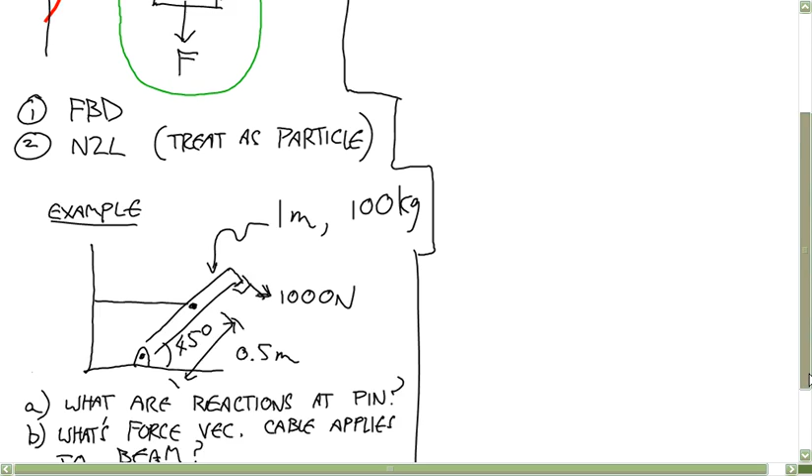To fill out that table, you need to break things up into vector components. And to fill things out in vector components, you need to choose a coordinate system.

So I'm going to put my coordinate system here. I'm also going to put my about point there, but keep in mind there's no reason you have to put your about point at the origin. You could put it anywhere you want, but a lot of times it makes the math simpler.

So what loads do we have? There's a force due to gravity, and then there are forces wherever anything's touching. We know there's a force here, so I'll write that one in right now - 1,000 newtons there. And then there's a force due to gravity, acting right at the center of mass, going down, and it's 981 newtons.

And then there are forces where anything's touching the object, so there's some kind of load - sometimes it can be a couple as well. In this case, what kind of loads are applied by a pin joint? A full force vector is applied by that pin joint, a 2D force.

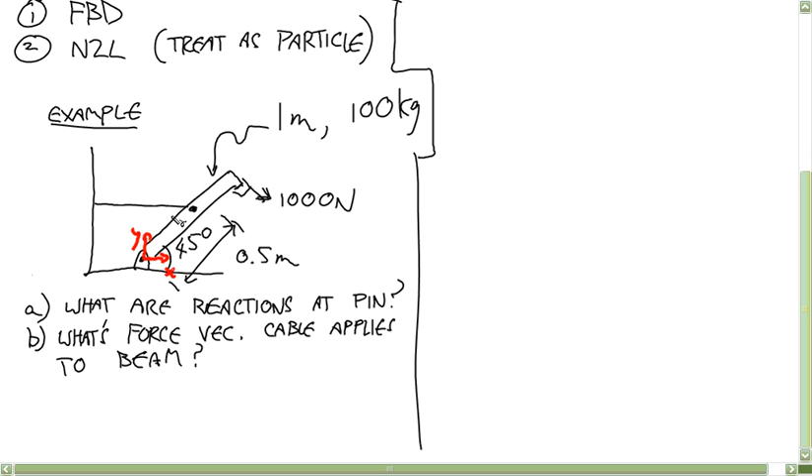So I'll write that like this, using the convention that this vector is the force on the body by the pin. And where else is something touching this object? Cable, yep. Since I'm going to specify the direction like this, that means I'll have a scalar variable, so I won't use that naming convention - I'll just call this tension.

So there's a complete free body diagram. Anybody have any questions about that, or anything wrong that you want explained?

Using the rotational second law, if you chose your middle point and did everything about it, you lose the weight and the tension force in your moment equation. That's totally correct - I chose it here, and then in our moments we lose that F_BP. So you gain something and lose something in either case.

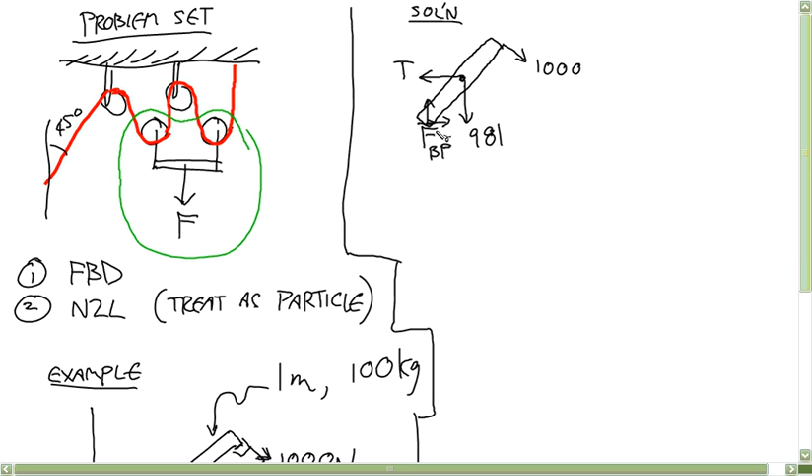Okay, so let's fill out that table: where the force is applied, the about point, the rho vector, the force vector, and the moment about A.

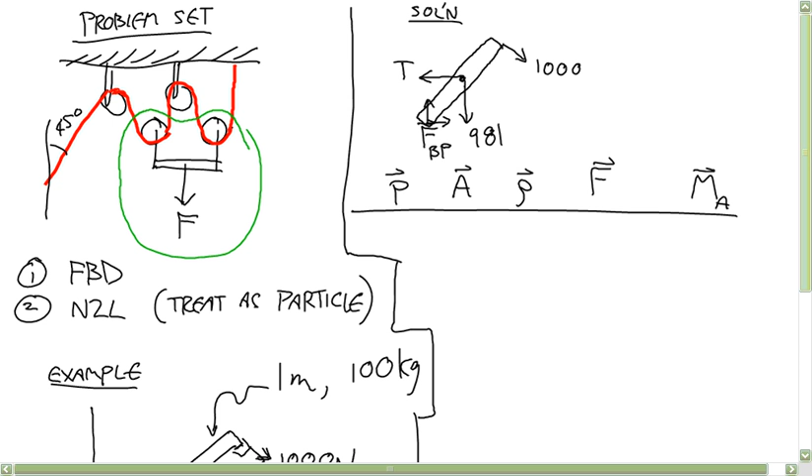I didn't think ahead where I drew this, but don't worry.

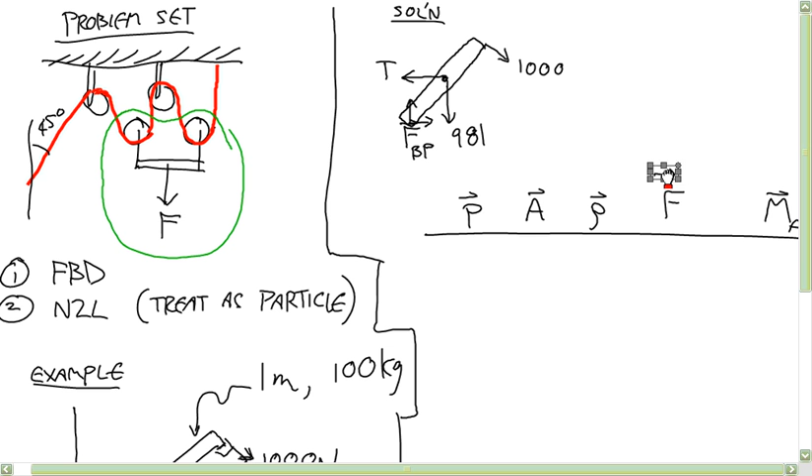Let's start with that force F_BP, the force on the body by the pin. Where is that applied in our coordinate system? 0, 0. For an about point, I said I'm going to choose the origin - you'd get different numbers if you chose a different about point, but your final answers will be the same. Once you choose your about point for the first force, that's your about point the whole way down. So rho is 0, 0, the force vector is F_BPX, F_BPY, and your moment is 0.

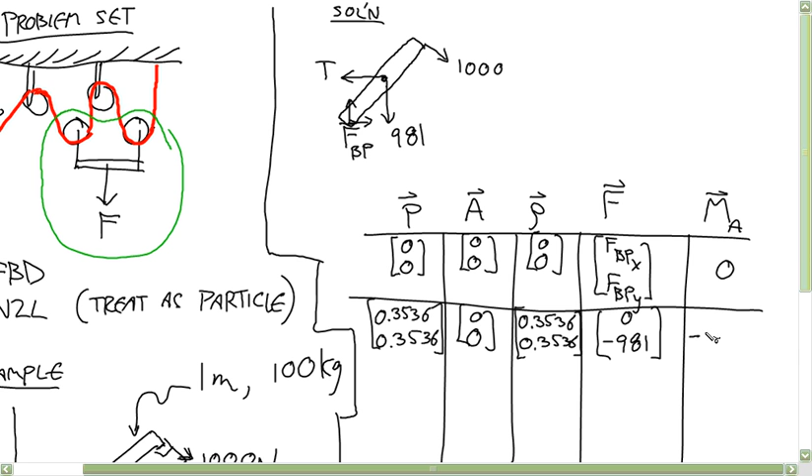Second, let's do that gravity force. Where's that applied? 0.3536 for both. About point stays the same, so rho is 0.3536, 0.3536. Your force vector is 0, negative 981. So your moment is 0.3536 times negative 981 minus 0, and you get negative 346.88.

Now the tension force - that's applied at the same point. It would work out the same if you put tension and gravity together and just say the point of the middle points, adding up X and Y. Oh yeah, sure, that'll work fine.

About point is the same, 0, 0, so the rho vector is the same. The force vector is negative t, 0. So you get 0 minus negative 0.3536t, giving you positive 0.3536t for the moment.

And then the last force is this one, and calculating that moment is pretty simple if you think of this as just a perpendicular distance from the force. But I'm still going to fill this out - you'll get the same thing. We know we should get a moment about this point of 1,000 times 1 meter clockwise, so negative.

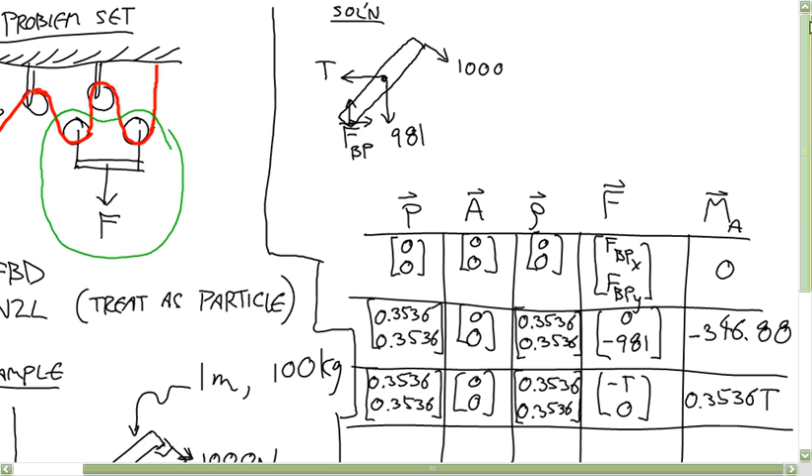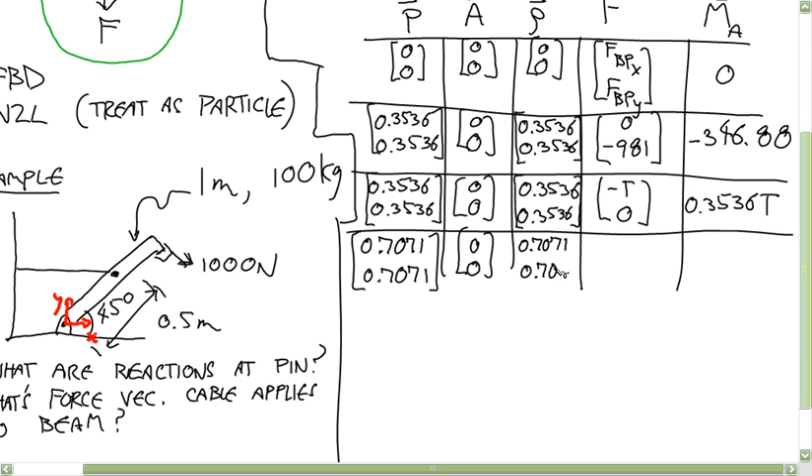This force acts at 0.7071, 0.7071. About point is the same, so rho vector is 0.7071, 0.7071. The force vector is positive 707.1, negative 707.1. So you have negative these two minus these two, and it gives you negative 1,000.

Any questions so far on that table?

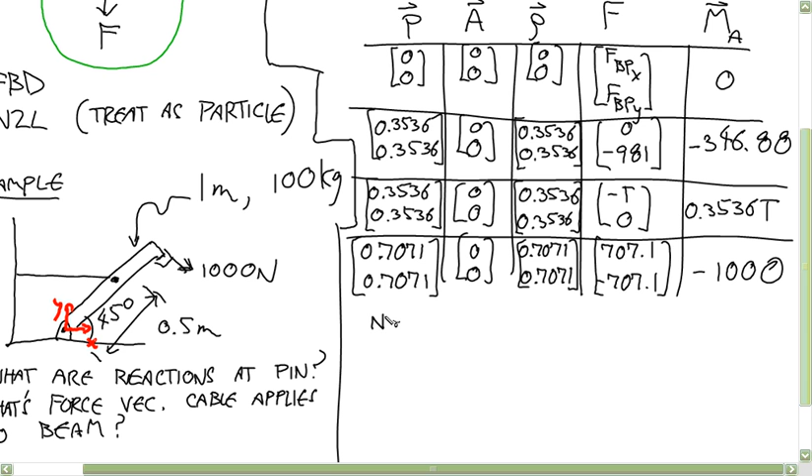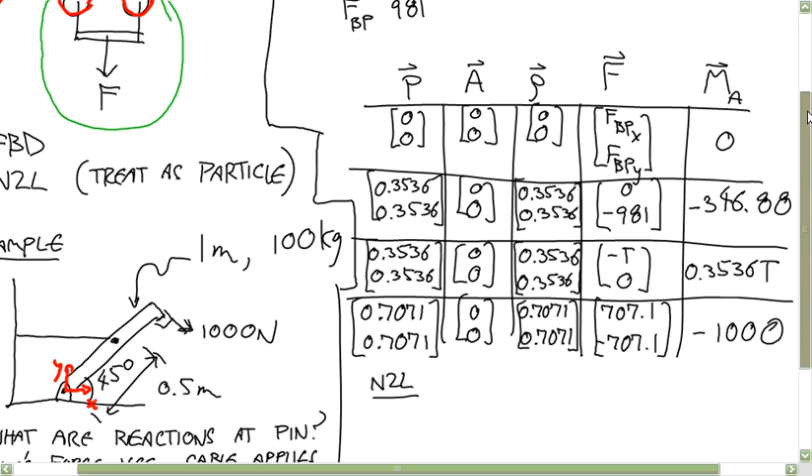Okay, so Newton's second law says - and we just go down the force column - F_BPX, F_BPY plus 0, negative 981, plus negative T, 0, plus 707.1, negative 707.1, is equal to 0, 0.

And the rotational version says 0 minus 346.88 plus 0.3536t minus 1,000 is equal to 0.

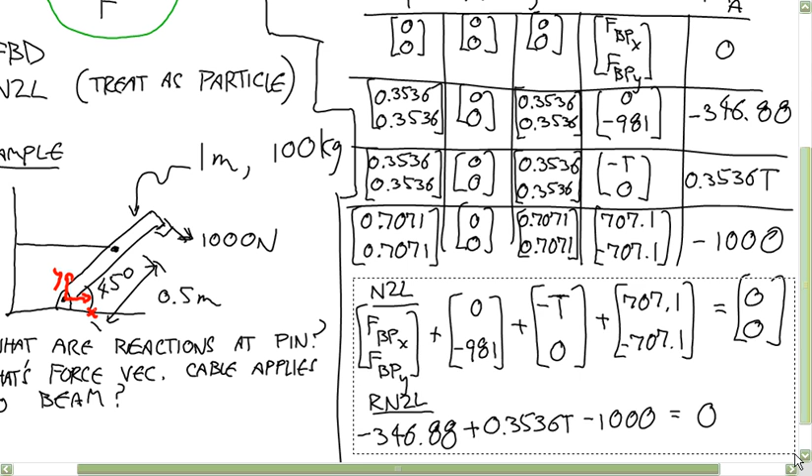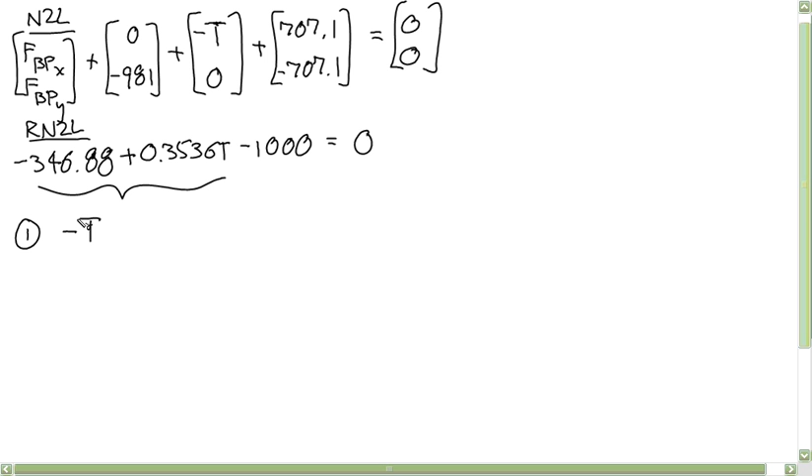Okay, so that gives us these three equations. I'll rearrange some stuff to put it in matrix form. So negative t plus f bpx is equal to negative 707.1.

Then we have f bpy is equal to positive 1688.1. And then third, 0.3536t is equal to positive 1346.88.

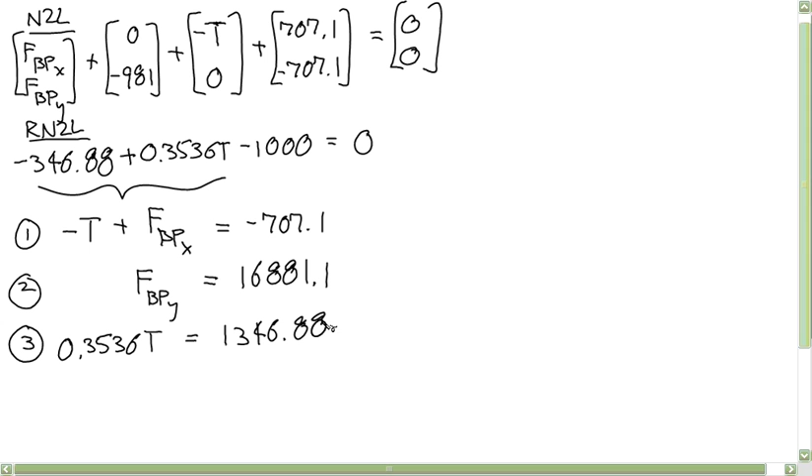So if you write that in matrix form, you get negative 1, 1, 0, and the order of the variables is t, f bpx, f bpy, is equal to negative 707.1. This one is 0, 0, 1, 1688.1. And this one is 0.3536, 0, 0, 1346.88.

Any questions up to there?

And if you solve that, what I got was t is equal to 3809.05 newtons, and f bp as a vector is equal to 3101.95, 1688.1. Anybody get all the way to those answers?

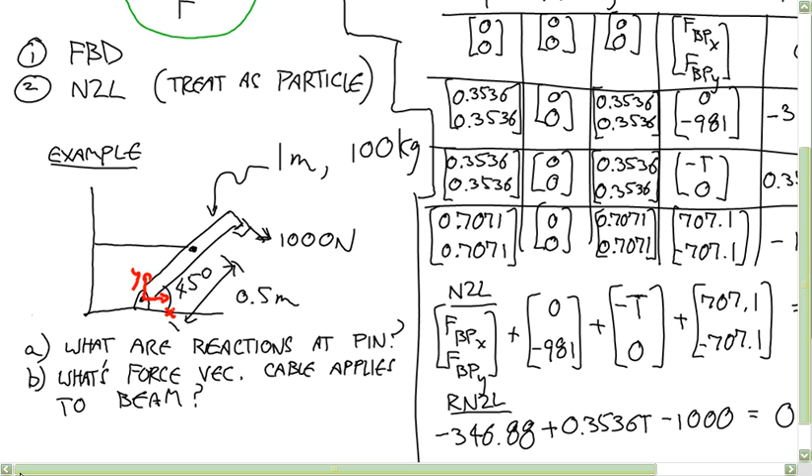What this calculation tells you that's interesting is, that doesn't look like a horribly odd way to rig a system up, but when you calculate those forces, you see that you're expecting that cable to hold a lot of force compared to the pin, which would be relatively stronger in most cases - like a metal bar as opposed to some kind of rope or cable. And so that starts to hint at where you might have failure of a system you put together. Do you have a cable that can withstand that? If you're planning to build this thing, you have to make sure you have a cable that can withstand that. And in order to know that, it leads into one of the classes you'll most likely take in the spring, deform.

Any questions overall on this problem? And number 2, you have F BPy is 1688.1. Yeah.

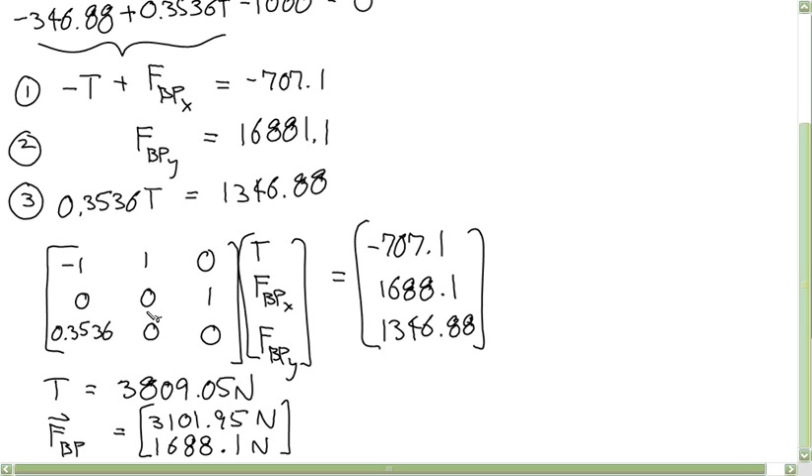Okay, so now I want to say something. I think I mentioned it once before, but I want to get something formally in your notes on statically determinate versus statically indeterminate.

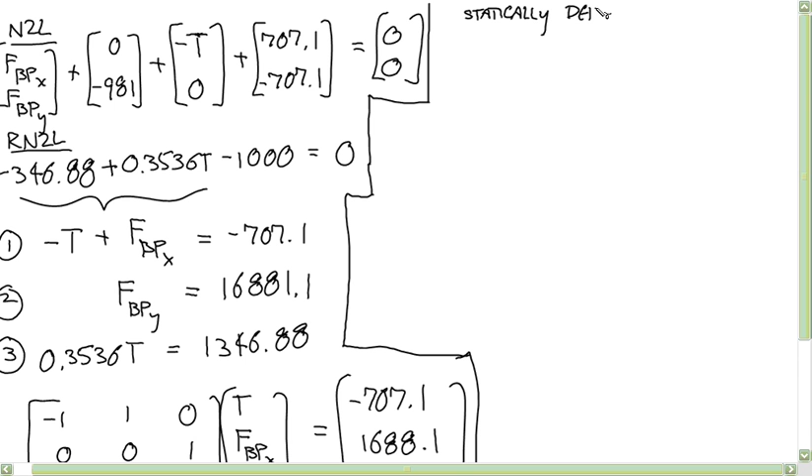As opposed, it's determinate instead of determinant. Notice that, because you always look smarter if you spell stuff right. Just like, so when you're at the U or wherever you're going, when you turn in homework, make sure stuff like that is spelled right. When you go talk to your professor, make sure you have a free body diagram to show him or her. Those two things will make such a difference in how you're viewed, in my opinion.

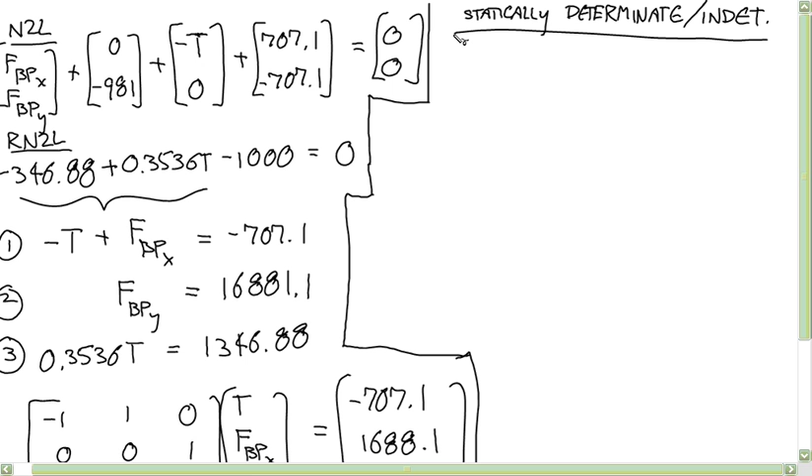Okay, so each free body diagram that you draw, if you're doing a 2D problem, you can get three total equations out of it, for if you're isolating a rigid body. If you're doing a 3D problem, you get 6 useful equations. What that means is if you isolate a free body that has more unknown loads than that, more variables need to be used to represent your loads, you can't solve it, right? It's a simple idea.

So if more variables than that are necessary, then your body is statically indeterminate. You just can't solve for it. Don't allocate yourself more time to fiddle with the algebra, you can't solve it. So that's called statically indeterminate.